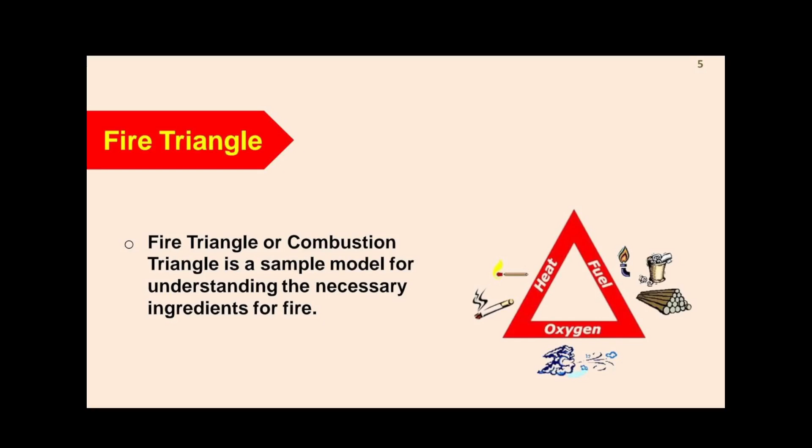So for fire tetrahedron, we have what we call the fire tetrahedron, which can be described as the fire pyramid earlier said, which is solid having four faces: oxygen, fuel, heat, and chemical reaction. This is the only area that explains fire to be of four faces, and it is the chain reaction that makes fire to be of four faces.

Take notes. The spread of fire can be direct and also it can be based on conduction. In the direct spread of fire, they are considered as the early stage fire spread entirely by contact of flame to combustible objects, where conduction will be the transfer of heat through solid materials.

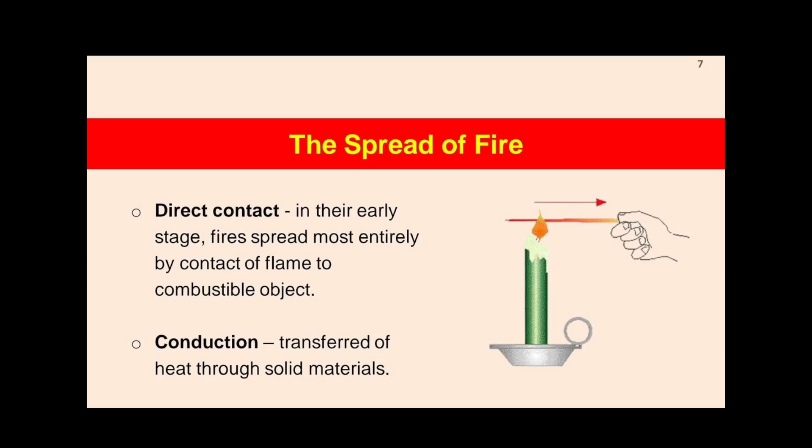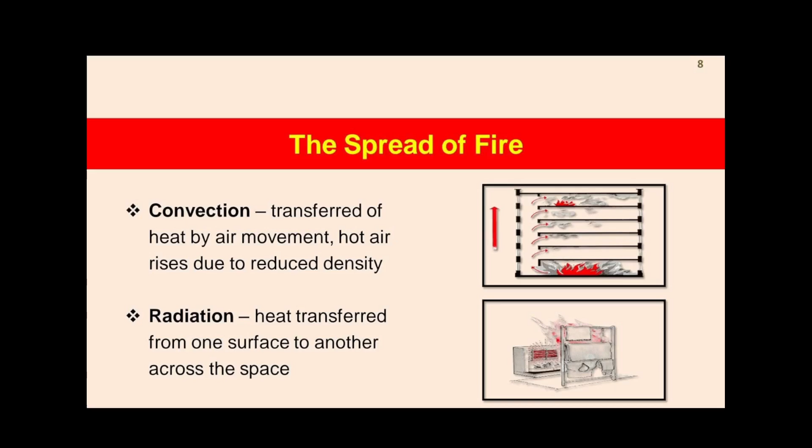Okay, then we also have convection, which is transfer of heat by air movement. Hot air rises due to reduced density. Then we have radiation. Again, fire is spread through radiation, and that is done based on heat transferred from one surface to another across the space.

For stages of fire, we have incipient or ignition. We also have growth, we have fully developed, and then also we have decay. Take note of the stages of fire.

So you can simply explain when a fire is at the incipient or ignition stage. The incipient stage is considered as that point when you discover that fire is actually starting. It's starting on a gradual note. It has not escalated to a larger extent, so that can easily be controlled at that point.

It can simply be controlled. But at the point of growth, it means it is outrightly increasing to the level where it may not be controlled at any point. When it goes to fully developed, at that point the basic thing to do is just to give room for it to burn, and the other level will be the decay, so it has completely destroyed things.

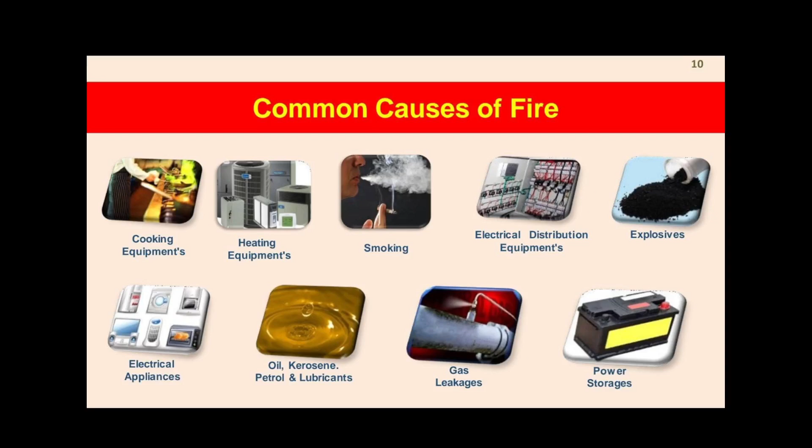Please take note of this. The common causes of fire: we have cooking equipment, heating equipment, electrical appliances, smoking, fuel power storage. So those are the common causes. So at this point we have come to the end of chapter 1.

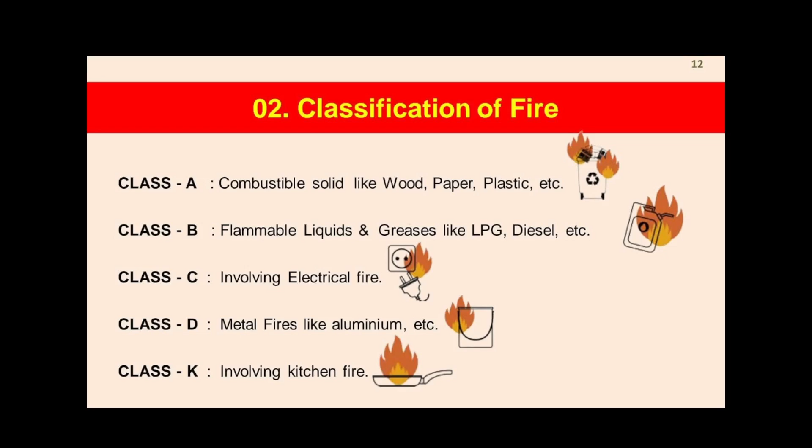Alright, so classes of fire, that will be from the beginning of part 2. Please take notes. So we have the following classes: class A, B, C, D, and K. For each of the classes, you can see class A is a combustible solid like wood, paper, plastic, etc., and flammable liquid and greases like LPG, diesel, and the likes is class B. And you can see that of class C, D, and K. These are the typical classes of fire.

Now, when fighting fire, what are those equipment that you are expected to use in fighting fire? Because those equipment used in fighting fire will enable you to fight the fire successfully.

So we simply look at firefighting equipment. Yes, so we have the fire beater, we have fire bucket, we have fire blanket, we have fire extinguisher, we have fire ball, we have fire hose reel, we have fire hydrant, and then also we have fire sprinkler.

Any of these firefighting equipment you desire to make use of, you also need to understand how they are to be used, so you will not use them wrongly.

A simple tool for fighting fire consists of a piece of rubber at the end of a pole, as you can see on the screen. Then also buckets, this is also an example of it.

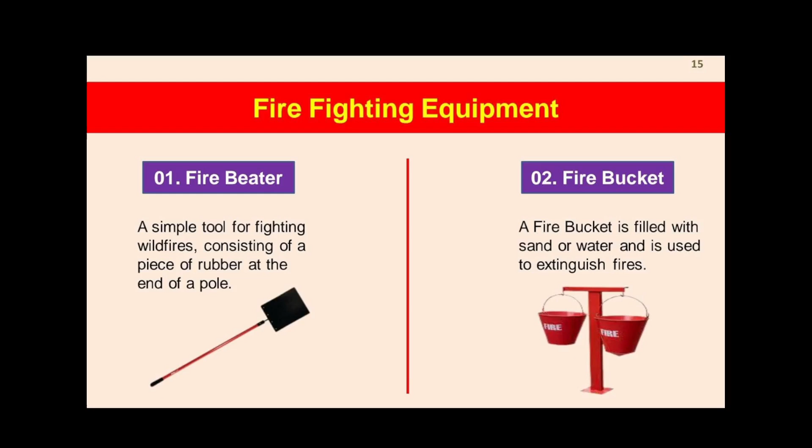We move to the next one, which is fire blankets. This is a sheet of flexible material, typically woven, like fiberglass, used to smother a fire in an emergency. We also have the fireball.

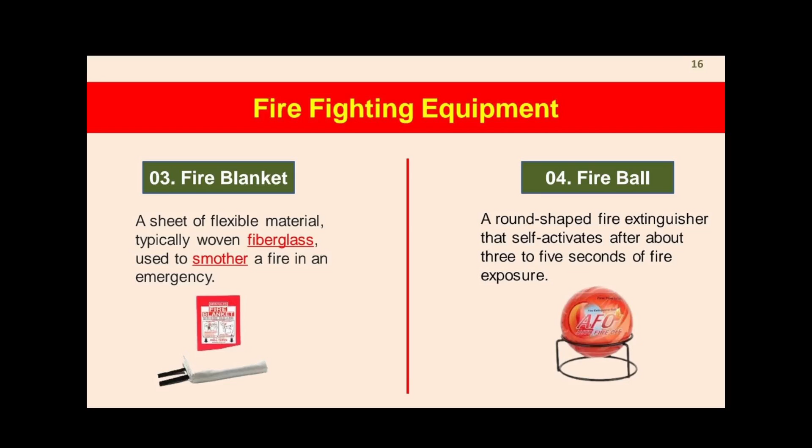You can see it's a round shaped fire extinguisher that is self-activated. Once you have something like that, it has to be properly positioned in the right place, where when it activates, it can easily put out the fire.

We have sprinklers. Sprinklers are usually fixed up on top of the roof, in the right position, to ensure an automatic extinguishing system that ensures fire goes out in that environment.

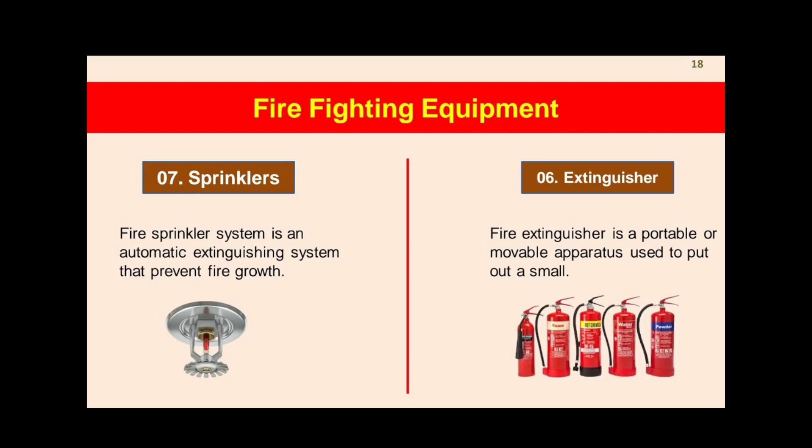Then the extinguisher, of course, this is the most popular part of all firefighting equipment we have out there. We also have types of extinguishers according to the types of fire, so you are required to buy the right type of fire extinguisher.

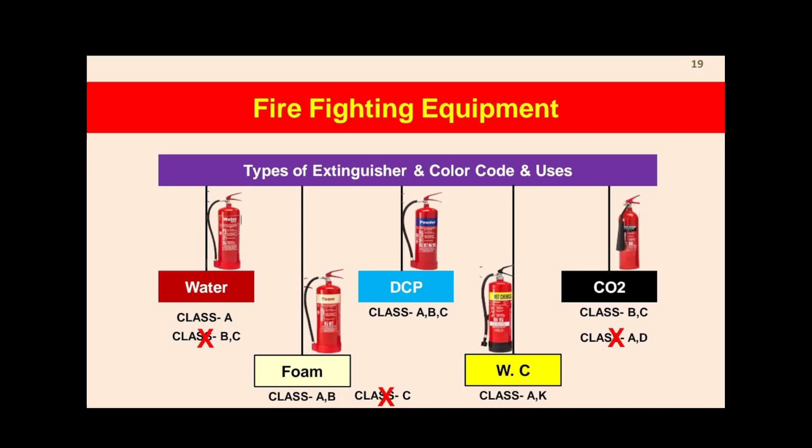In buying the right type of fire extinguisher, it's also based on the kind of operation that is being executed in that environment. So anytime you go to market, select the right fire extinguisher.

So you pull the safety pin, then aim at the target, squeeze the handle to trigger the gas out, and then sweep side by side, left and right.

Fighting fire equipment, still there are tips we need to always understand when we are making use of an extinguisher. Check for your own safety before starting to extinguish a fire. Your safety is very important, because it is someone who is safe that can be able to extinguish fire.

Also assess the fire. Only a small fire should be fought using a fire extinguisher. Ensure that it is a fire you can fight before you use the extinguisher on it. Select the right type of fire extinguisher.

Remember the simple acronym, very important: PASS, pull, aim, squeeze and sweep. Always try to work in pairs for safety.

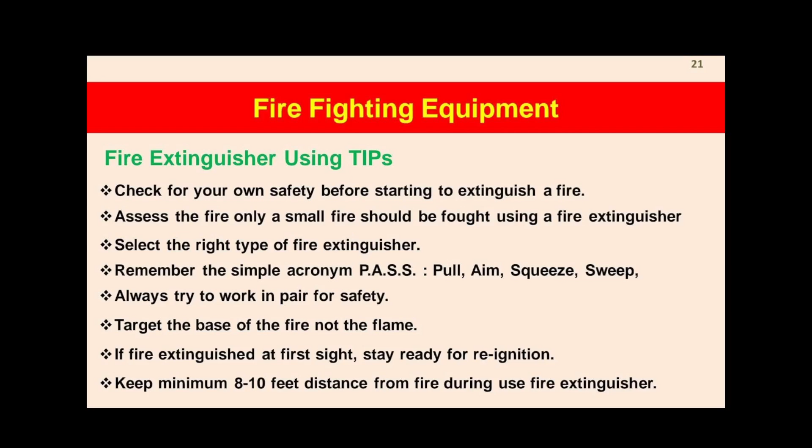Then keep minimum distance, that is between 8 to 10 feet, from the fire during fire extinguishing. So you are not required to go very close to it.

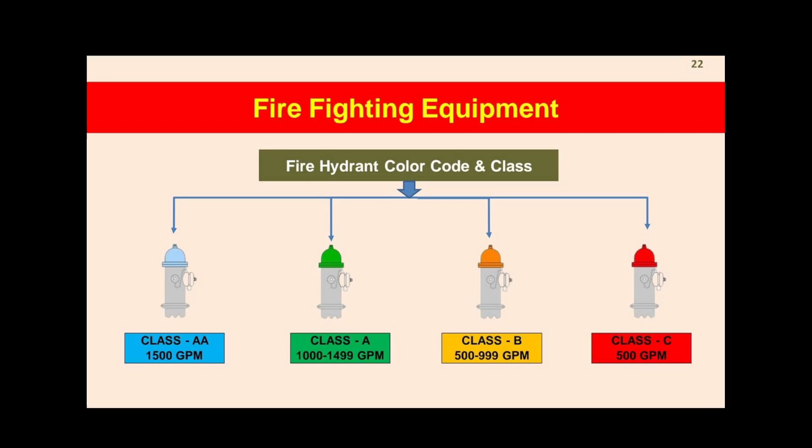The next firefighting equipment is the fire hydrant. Look at the color code and classes. You can see that fire hydrants do not just have one particular color. They have various colors, and they also have various classes.

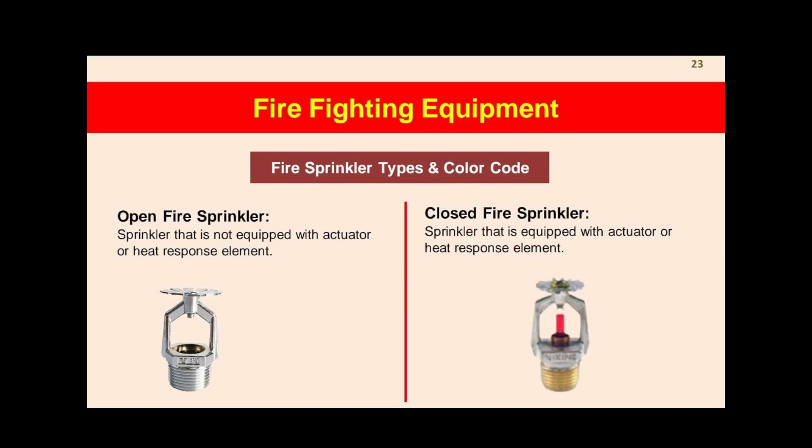For the sprinkler types and color, we have open sprinkler and closed sprinkler. The open sprinkler is not equipped with an actuator or heat response element, while the closed sprinkler is equipped with an actuator or heat response element. That's just the difference.

So at every point, always be on the lookout for the fire sprinkler, and be able to get the right one based on the operational facility.

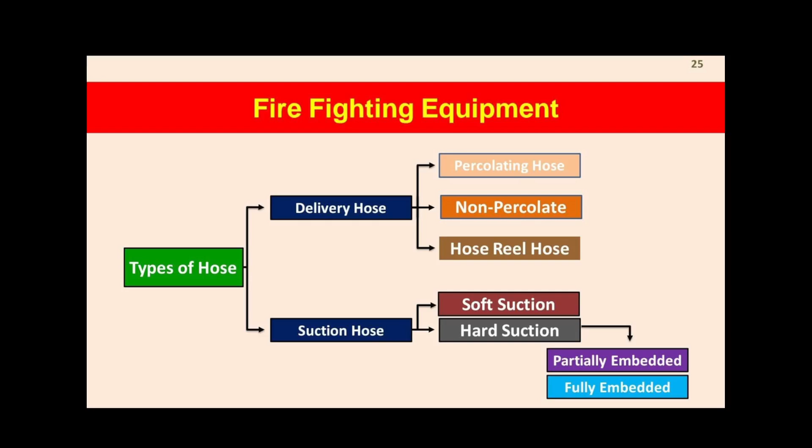Now we have the types of hose, that is delivery hose and suction hose. For delivery hose, we have percolating hose, non-percolating hose, and hose reel hose. Then we have soft suction and hard suction when we talk about the suction hose. These are partially embedded and fully embedded as well for suctions.

Now, types of hose. Yes, so we have the types of hose, as you can see, all of these hoses, as explained earlier on.

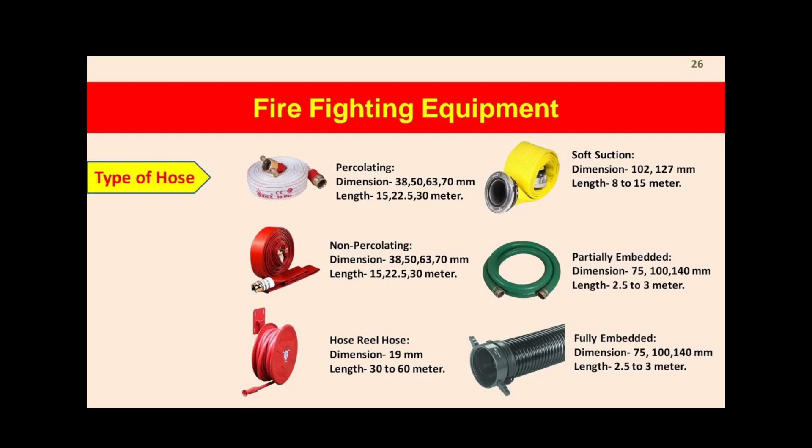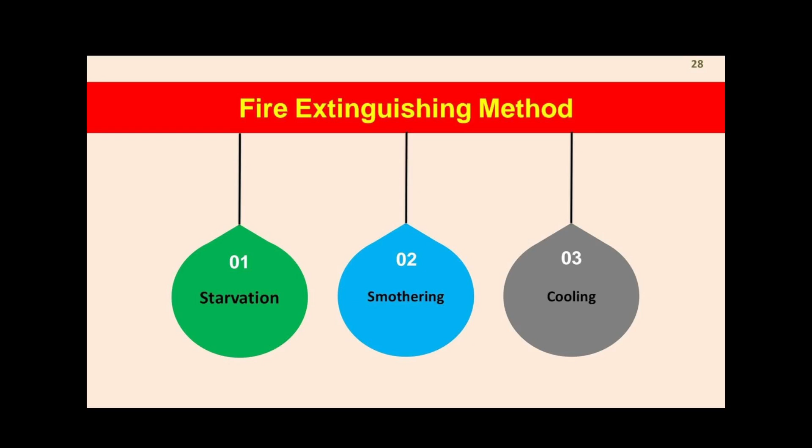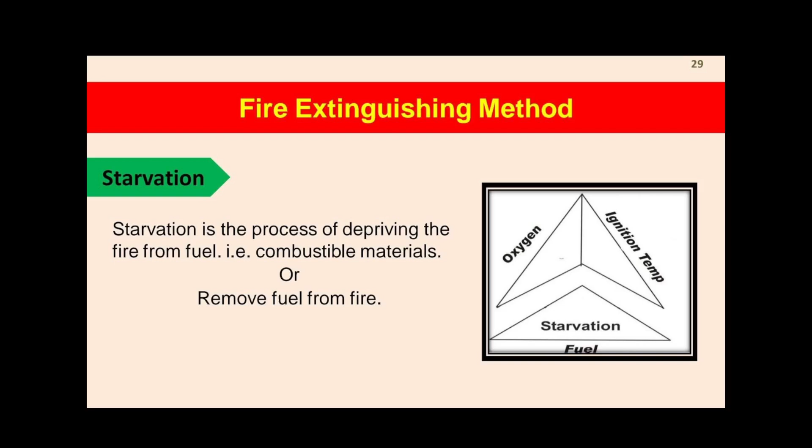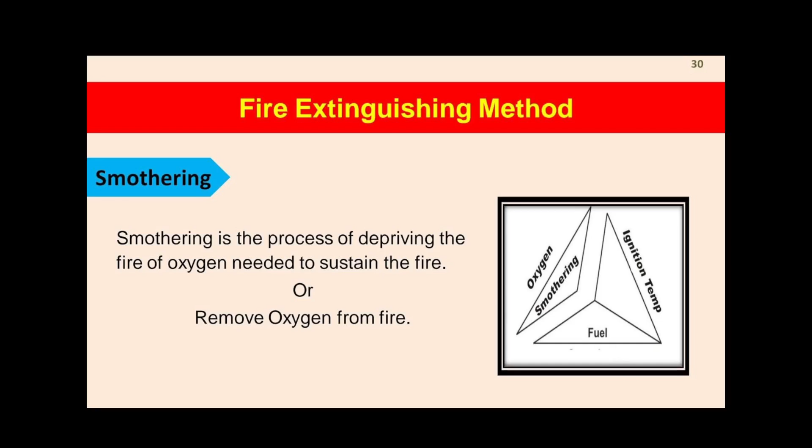Starvation is the process of depriving the fire of fuel, e.g. when you remove any of the combustible materials or remove the fuel from the fire, you're automatically putting out the fire. Smothering is the process of depriving the fire of air, that is oxygen needed to sustain the fire, or removing the oxygen from the fire. Whichever way you do it, you are automatically smothering the fire.

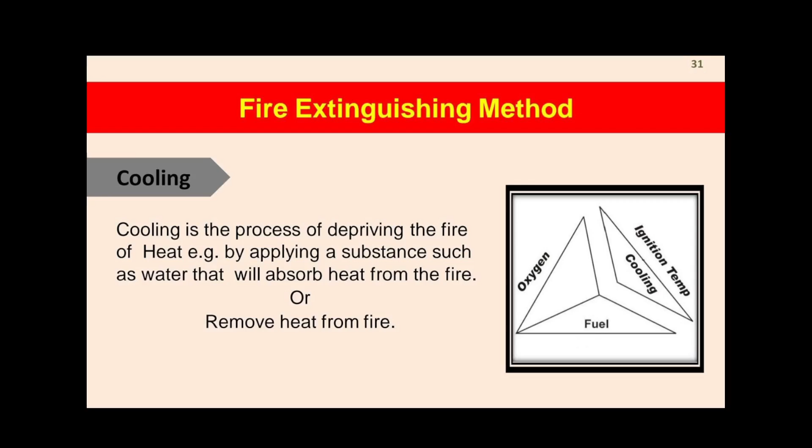Then cooling the fire is depriving the fire of heat. This will absorb heat from the fire or remove the heat from the fire.

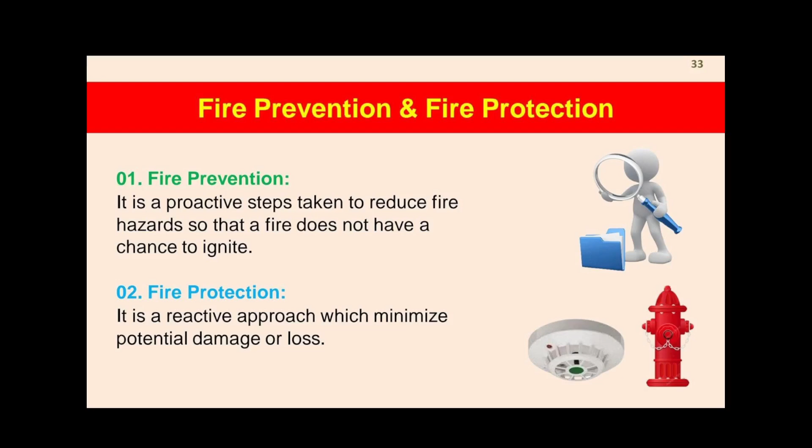Now we have prevention. How do we prevent fire, which is very, very important? It is a proactive step taken to reduce fire hazard so that a fire does not have a chance to ignite. Fire protection is a reactive approach which minimizes potential damage or loss. So proactively, you take necessary steps to ensure that fire does not occur, because if it does, a lot of things will be lost.

In fire prevention, you need to have the following in place, or ensure you carry out fire safety exercises by preparing the fire safety plan, which must always be approved. Then carry out risk assessment, updating it at least every 6 months.

Then have a workplace inspection. Let it be done according to the nature of the operations in the environment. This could be done daily, weekly, monthly, or quarterly, all depending on the nature of the operations being executed in that environment.

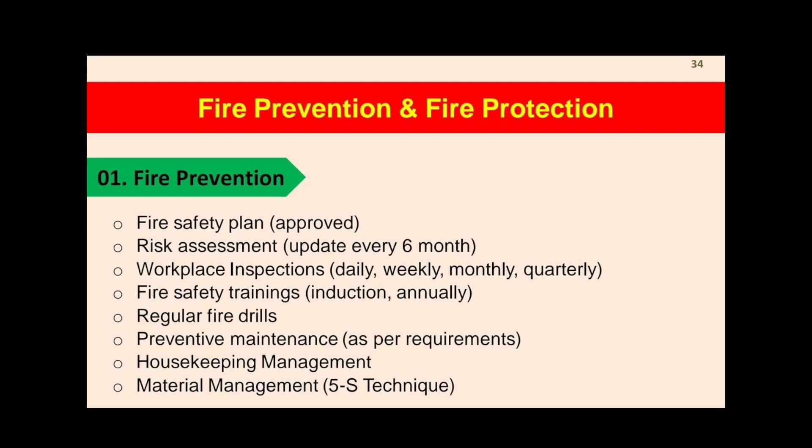We also have fire safety trainings. Induction and annual fire safety training should be done for all workers or staff. Regular fire drills should be conducted. Preventive maintenance as per requirements should be conducted as well. Then housekeeping management should be done, and material management should also be taken note of.

In fire protection, active protection simply means that the system detects and extinguishes the fire when it is about to escalate, not when it has escalated. This could be done manually or automatically, depending on the equipment structured in the facility.

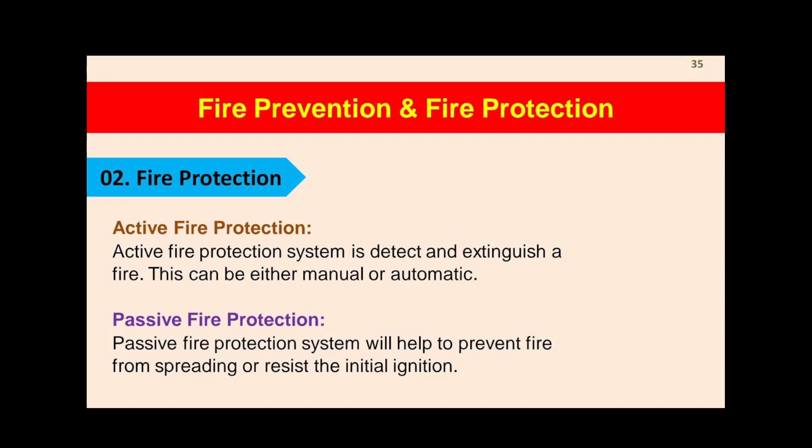Then we have passive fire protection. This is a system that has been designed to help prevent fire from spreading or resist the initial ignition.

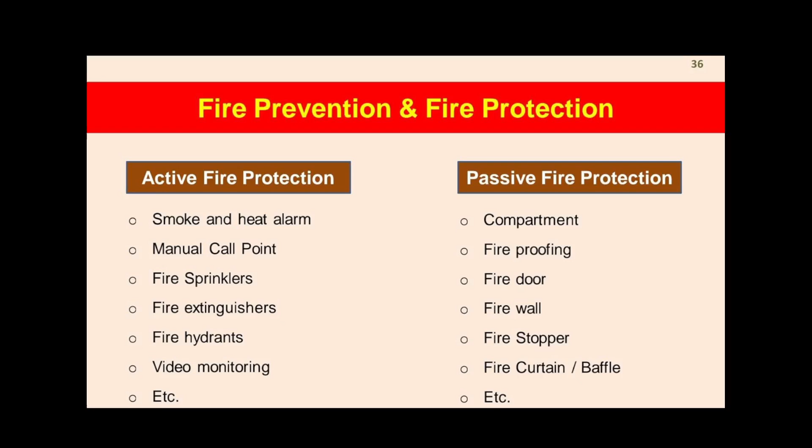The difference between active and passive fire protection: for active fire protection, smoke and heat alarms are required, manual call points are required, fire sprinklers are required, fire extinguishers, fire hydrants, video monitoring, and more must be in place. Passive fire protection includes compartmentation, fireproofing, fire doors, firewalls, fire stoppers, fire curtains, and baffles. These are the differences between passive fire protection and active fire protection.

As we continue, the next is the fire alarm system. There are numerous fire alarm systems depending on the operation size or which one you actually desire. It is a safety appliance that receives information from devices, signals to detectors, and reports fires immediately by monitoring their operational integrity.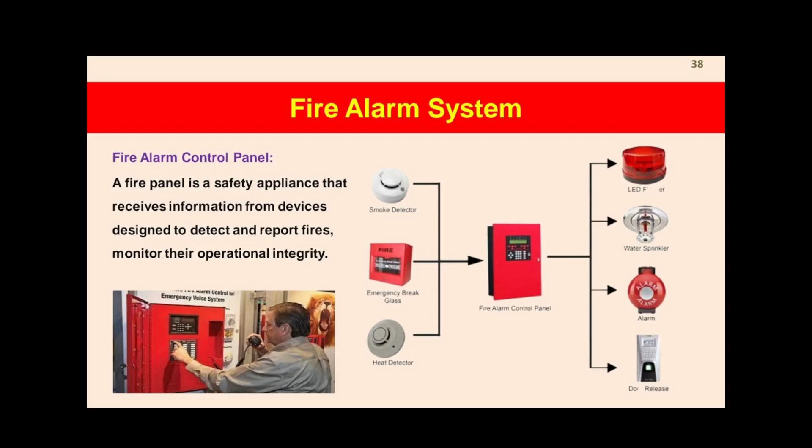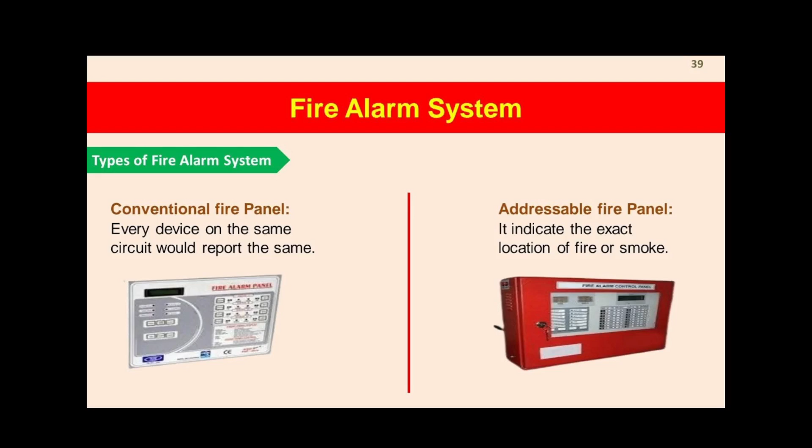We have the types of fire alarms: conventional fire alarms and addressable fire alarms. Every device on the same circuit would report the same, while for addressable, it indicates the exact location of fire or smoke. Major organizations with heavy duty equipment are required to have the addressable fire panel, so it can simply tell you where the fire is coming from, and you don't have to be running around looking for the direction.

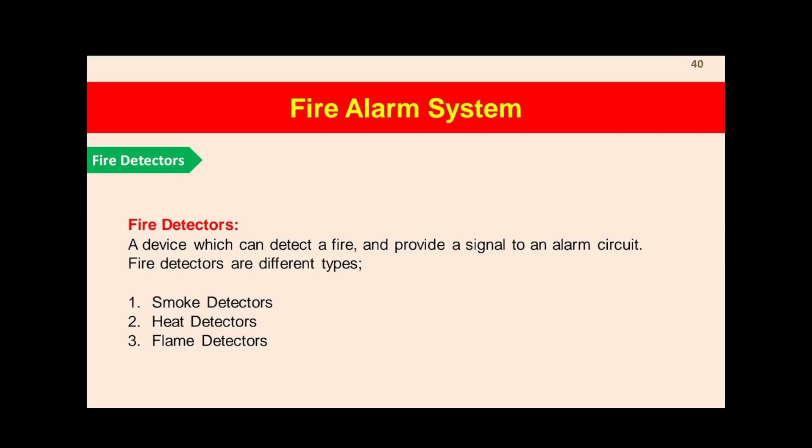For fire detectors, this is basically a device which can detect a fire and provide a signal to an alarm circuit. Fire detectors are of different types: we have smoke detectors, heat detectors, and flame detectors.

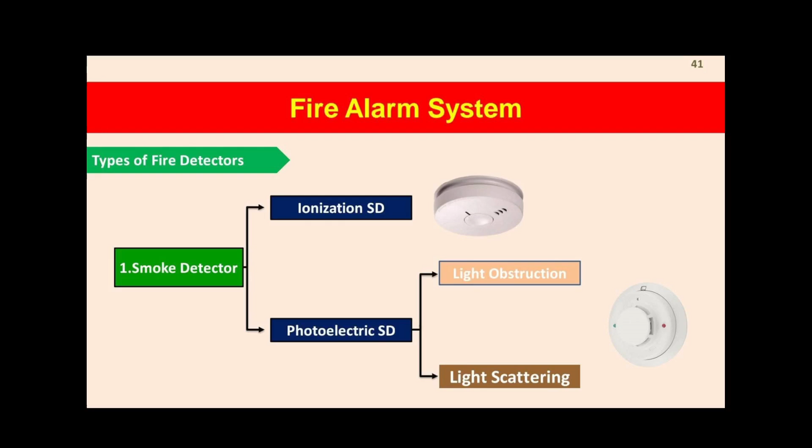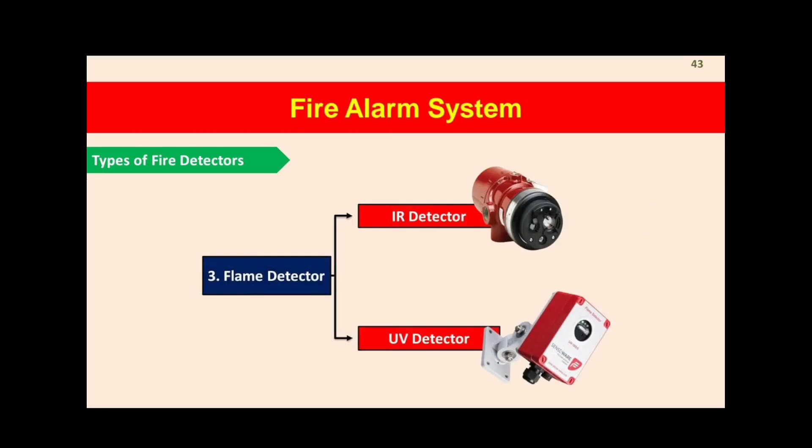The manual call point is a device used to initiate an alarm signal. It operates by means of a simple button press or when glass is broken, revealing a button. They can form part of a manual alarm system or an automatic alarm system, depending on how it is structured.

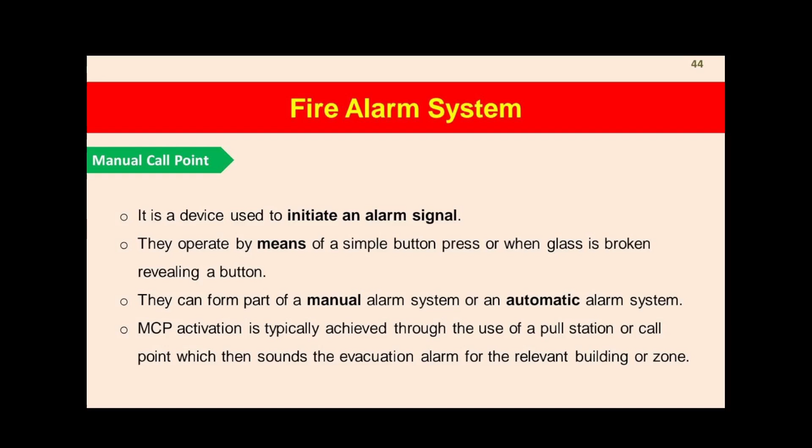Manual call point activation is typically achieved through the use of a pull station or call point, which then sounds the evacuation alarm for the relevant building or zone.

We have once again come to the end of this particular chapter, and we'll continue on the next chapter, which is fire evacuation procedure. So if fire happens in a facility, what are the actions that need to be taken?

So we have action on hearing alarm. Don't panic and be calm. Stop any activities immediately and prepare to leave the room. Turn off all ignition sources such as AC equipment, etc.

Evacuate the room to the nearest safe assembly area. Remain in the assembly area until instructed to leave. After all is clear, then you can continue your work. Assembly area checklist must always be conducted.

So all employees assemble at their designated assembly area, far enough away from flying glass and other objects. Head count of employees is done and reported to the ERT head.

That is the emergency response team. Then the injured are informed to the ERT team. Access to emergency vehicles must not be hindered, ensuring there's no hindrance to their use, especially when it has to do with saving lives.

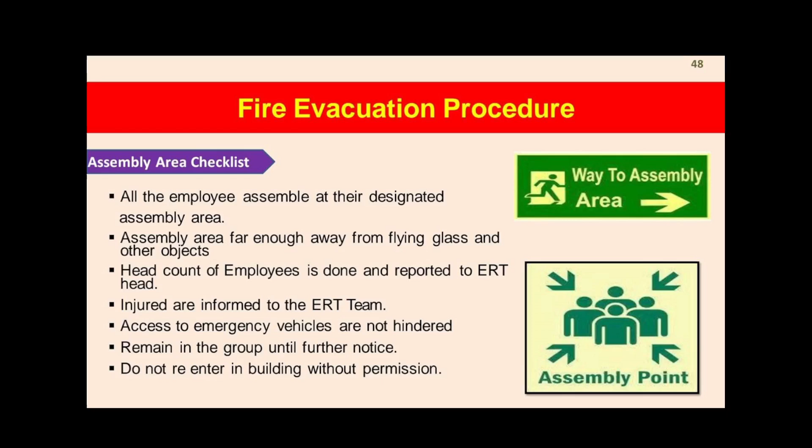Emergency reporting: you need to call 911 or any other emergency number available at your location. Don't forget to describe the incident location, describe the nature of the incident, and report injuries if any. Give your name, badge number, and contact. Repeat the above information again and stay on the line until further instruction has been given.

Now the RACE method, yes, it's called the RACE method. The first is to Rescue, Alert, Contain or Confine, then Extinguish or Evacuate. So always make sure you don't forget the RACE method.

So duties of an ERT: all fire equipment are always in working condition. Any deviation needs to be reported to facilities or the security team almost immediately.

An ERT should know the location of fire extinguishers and their handling techniques. ERTs help security and fire teams in case of any fire accident or incident. ERT needs to ensure emergency situations are handled peacefully and authoritatively without any stampede.

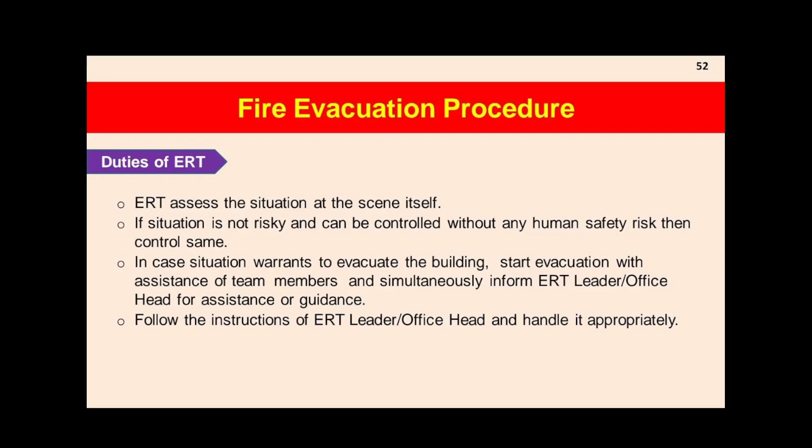Simultaneously inform the ERT leader or office head for assistance or guidance, and follow the instruction of the ERT leader or office head, handling it appropriately.

If your clothes are on fire: stop, drop, roll. Don't run, it will make the fire worse. Get down onto the floor and roll on the floor. When you roll on the floor, you are automatically putting out the fire.

Take note of this. Now we continue to the next chapter, fire safety general requirements. Storage of flammable and combustible materials shall be minimized, and incompatible materials, e.g. flammable and oxidizer, shall not be stored together.

Minimum clearance of 0.6 meters or 2 feet shall be maintained between the ceiling and the top level of any stocked material below. Also, minimum 0.5 meters or 1.5 feet clearance between the top level of stocked materials and the sprinkler head.

Temporary wiring shall be installed according to the provisions of NFPA 70.

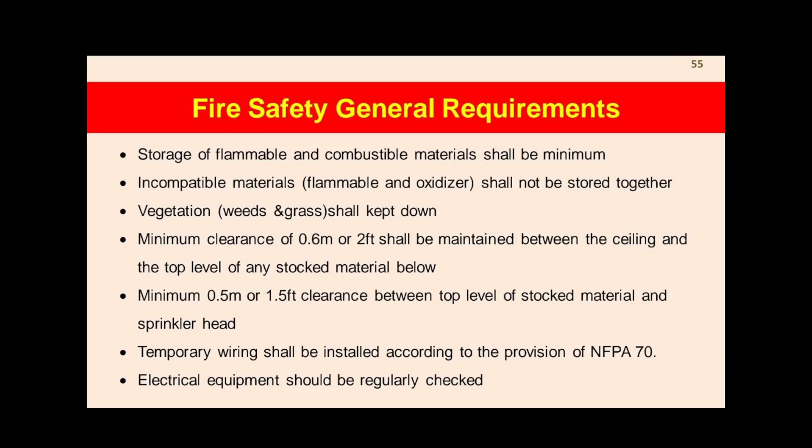Electrical equipment should be regularly checked, and GFCI, that is ground fault circuit interrupters, shall be provided where required.

Smoking is permitted only in designated smoking areas. Open fires or open burning of materials are strictly prohibited. Proper bonding or grounding techniques shall be used for any operations, and don't forget to train and certify a fire watch, who should be present at all hot work areas in the work environment.

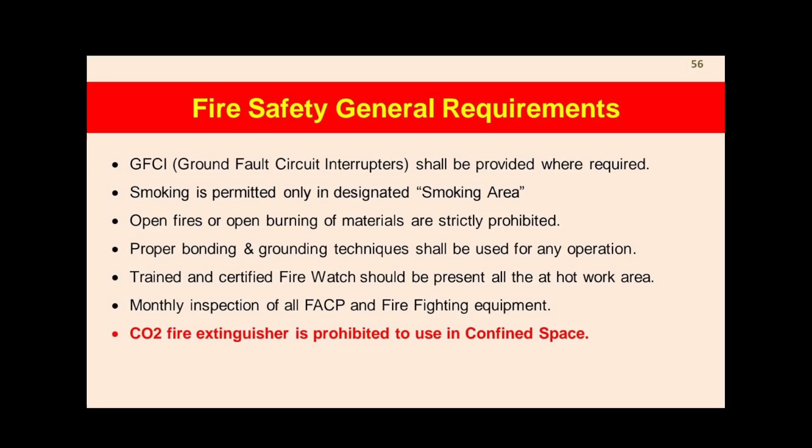Ensure monthly inspection of all FACP and firefighting equipment. Important: the CO2 fire extinguisher is prohibited to use in confined spaces. Please take note of this particular one.